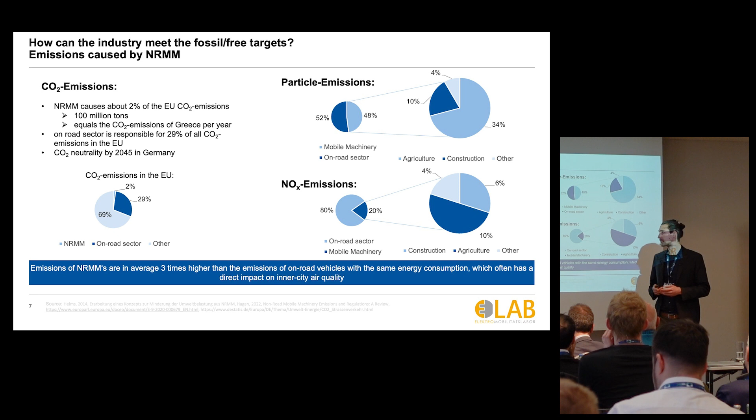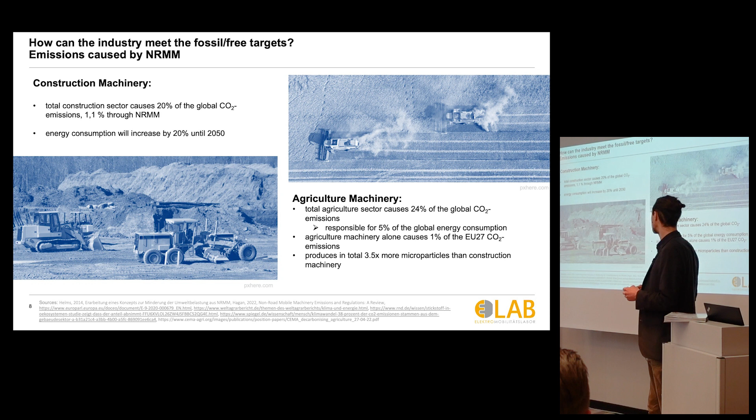And especially the agricultural sector as well as the construction sector play a critical role there. We have 20% of global CO2 emissions in the construction field, as well as about 24 or 25% in the agricultural field. About 1% of each make up the total CO2 emissions that go into the NRMM sector. As I said, the particulate emissions are very important, and up here on the right-hand side, you see the emissions during a working day.

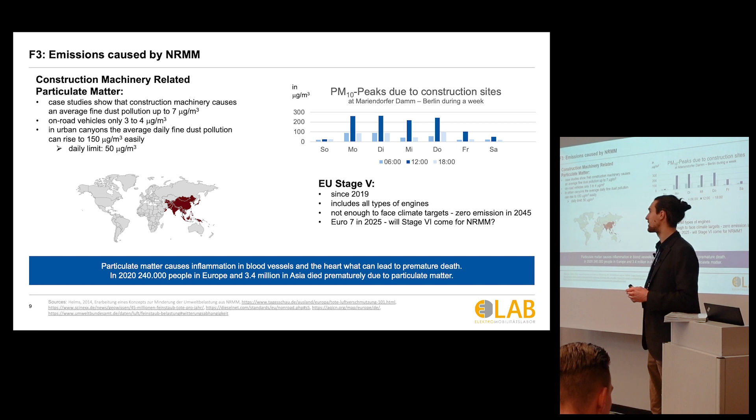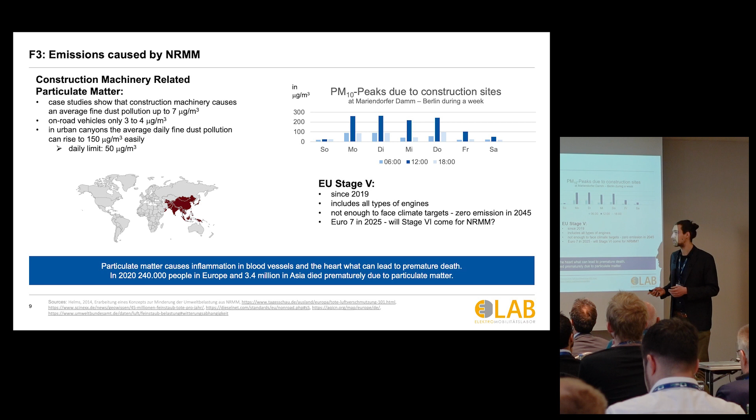This is important for Europe, but this is especially important in the Asian region, where the standards are currently a little bit lower. So therefore, we really need to electrify the drivetrain of construction equipment, but also of agricultural equipment, because the diesel engines there even have higher particulate emission than if you look at the construction machineries that are in place right now.

So that said, I will go a little bit more quickly over the first slides, and then we will focus a little bit more. So what does the market hold, and what do we need to focus on?

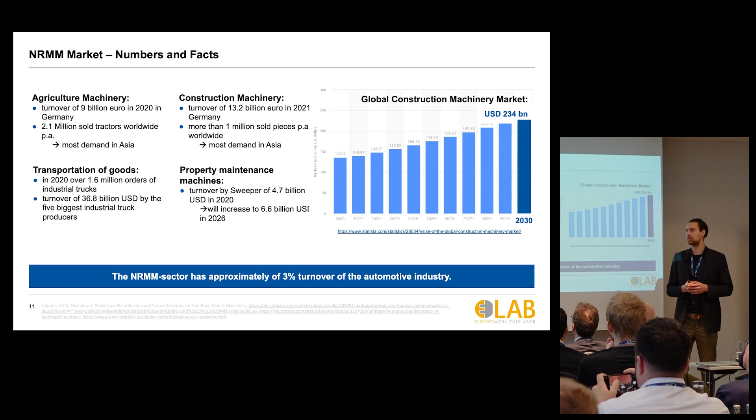We see that generally the trend in NRMM is positive, so the market is emerging. Here you see a graphic for construction machinery. We are around 230 billion US dollars in the year 2030, just to give a rough estimation of the market size. Currently, Germany makes up about 9 billion for the agricultural sector and about 13 billion for the construction sector. So generally there is a trend, although the NRMM sector is still relatively small in its complete turnover, with 3%.

So looking at the challenges we are facing, status quo. First of all, we look at the technical challenges, especially for energy supply. We need batteries or fuel cells to power our machines, and the current performance, of course there's a wide variety of different chemistries that can be applied, and we'll come to that in a minute, but that is still a limiting factor, which is holding back all the innovation in the sector that could be realized right now. And looking at our NRMMs as a whole, functional safety has to be considered during development.

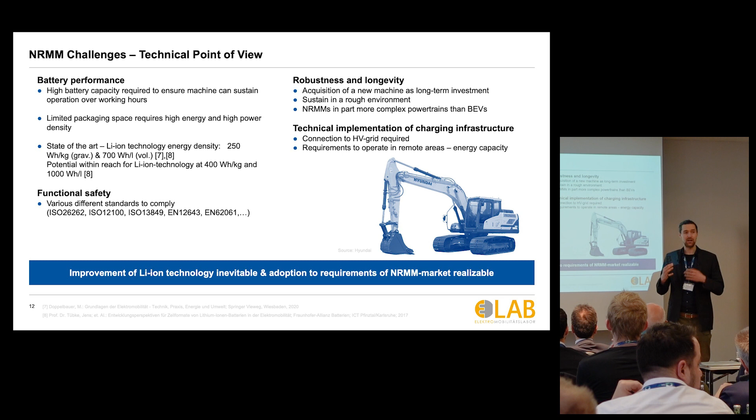Status quo, right? We are working on improving this, of course, but I think, especially for the agricultural sector, it will still not be in place in the future. So it's not an infrastructure solution that we have to come up with, but rather a technical one - increasing the capacity and the energy utilization, the efficiency of the electric drivetrains for those applications.

However, in order to decrease the cost, and we will come to the point of using scale effects to further reduce the economic burden, there are solutions in place, or actually in development, on modularizing the given battery packs in order to decrease costs. But I will come to that in a minute.

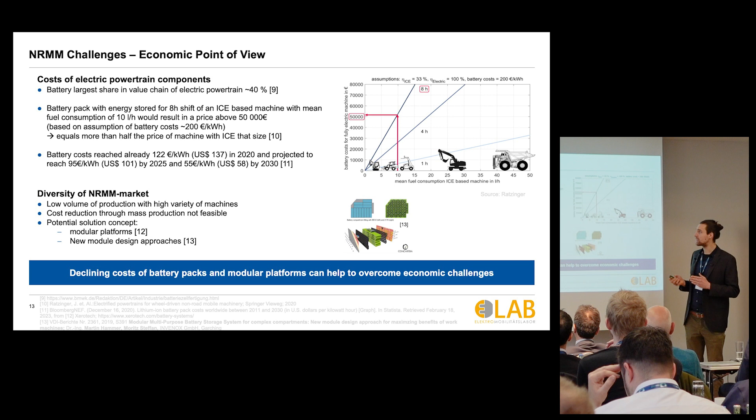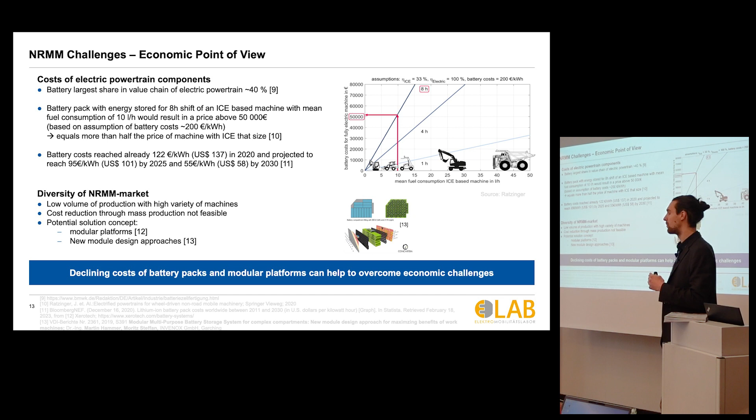So the key message here is it's still a burden implementing the battery drivetrain. If we increase the fuel consumption per hour, battery prices are decreasing, and there will be a touching point at some point where it will become more feasible. But I think we still have to wait a little and also take other challenges into consideration, and that is what I would coin here as the operational point of view.

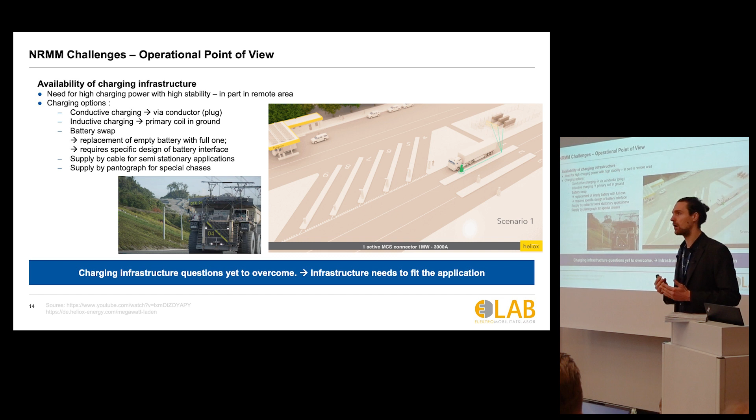So as I mentioned with the agricultural sector, charging infrastructure is not everywhere available. And the question now is, how can we solve that issue? One would be just increasing the capacity. We just saw that from an economic point of view that may not be suitable.

And then there are solutions like inductive charging, overhead lines using a pantograph. Those may be solutions, but I think only in particular areas where it really makes sense.

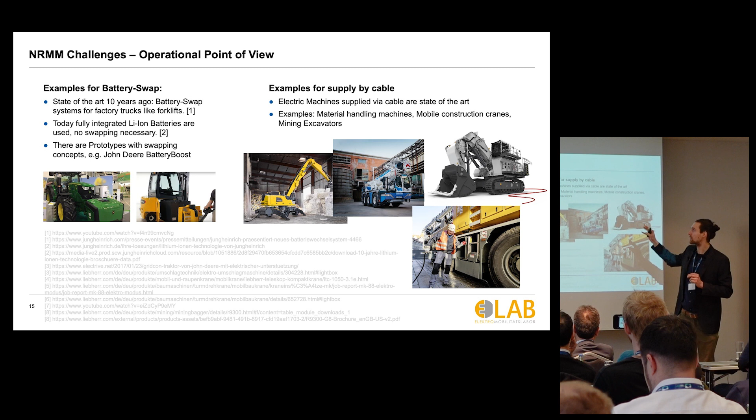One thing that is also important is the charging time, which I would like to emphasize in a minute. Before that, I'd like to emphasize two more solutions. Battery swapping is something many companies used in the past. For small applications, we see a decrease in battery swapping technologies because lithium-ion technology is ready to power through the working day. But for high energy intense applications that are rather stationary, you see power supply by means of a cable. This is certainly also the status quo right now and what you can buy on the market.

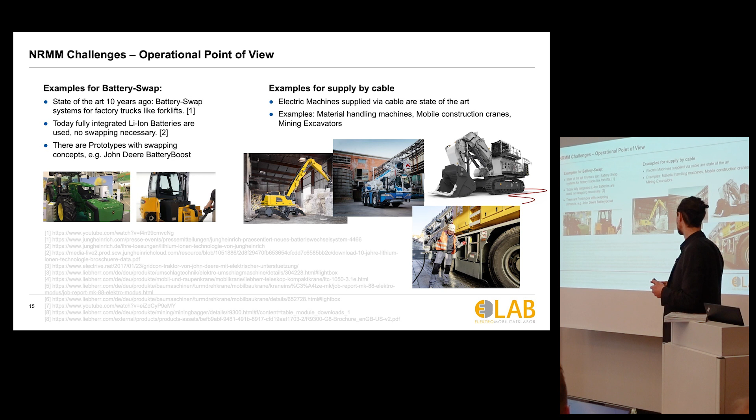Coming back to charging: consider the workday, which is generally 8 hours and potentially segmented into two 4-hour parts, morning and afternoon, with the lunch break allowing for charging time. So we did a quick calculation comparing diesel with megawatt charging, which is kind of the gold standard right now and the state of the art in research.

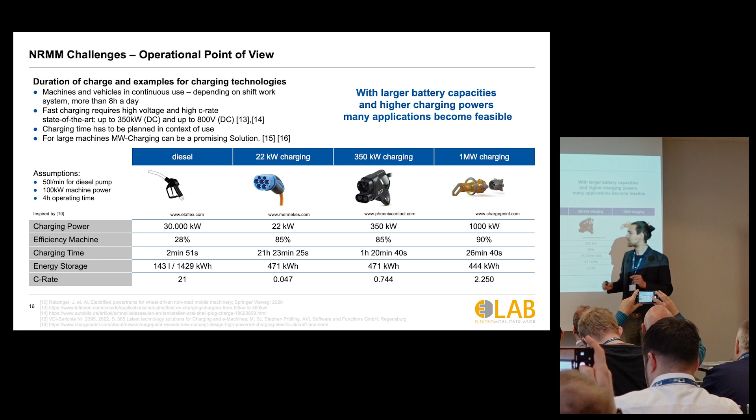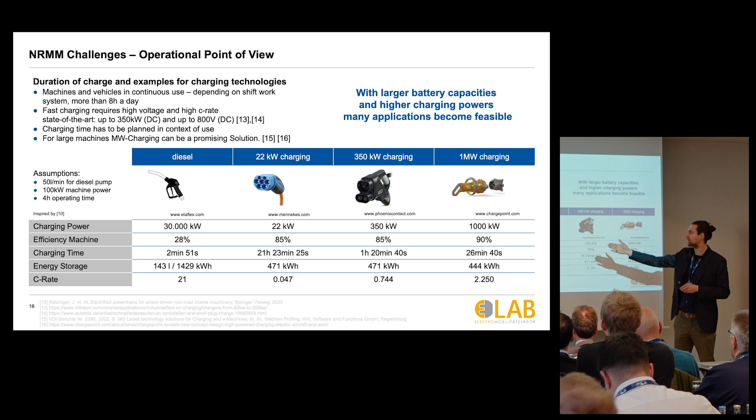So the C rate, meaning the full capacity the vehicle can retain within 1 hour, would be 1. For diesel, the gas inflow into the vehicle when tanking is about 21, so I could fill it up 21 times per hour, meaning I need 2 minutes to charge the combustion vehicle. If I look at the megawatt side, I can bring it down to 26 minutes.

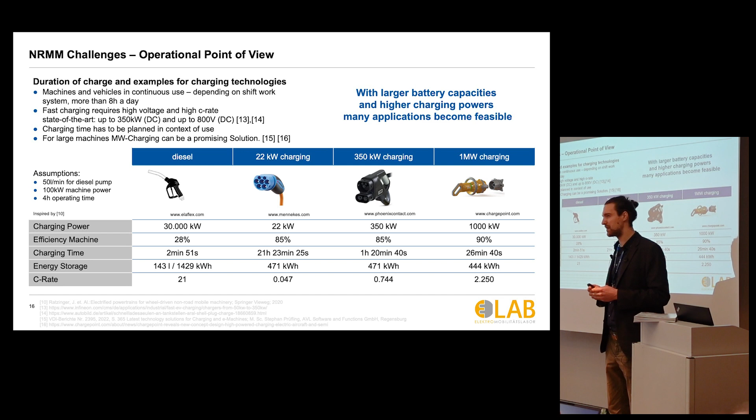That's as good as I can get right now in this example case, which would mean there may be a solution that even if we cannot power throughout the whole day, we may do so for 4 hours, then charge at midday, and use the next 4 hours with the recharged vehicle. So this example case should emphasize that many applications may become feasible due to this technology.

Very quickly, looking at services - that was a question asked by the organizers of the conference. What are the services companies can offer their customers right now? I only want to emphasize one point here, which is to include not just the product, but the service as such.

Meaning, we just talked about operational planning, right? When do you charge? How much do you charge? Having those calculations done is what we see right now within some companies. So they're not offering just their product, but very often also a service in addition to the product itself, so that the operation becomes more efficient and more effective.

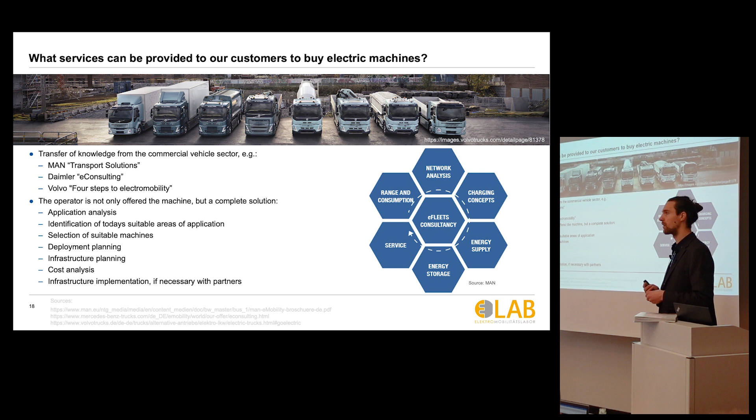There are companies like Volvo, MAN, or Daimler offering different services right now. Not to emphasize any one of those, but just to give an example of what is coming and emerging there. I think this will increase further because we see such trends also in the automotive industry, where this integration along the value chain is happening.

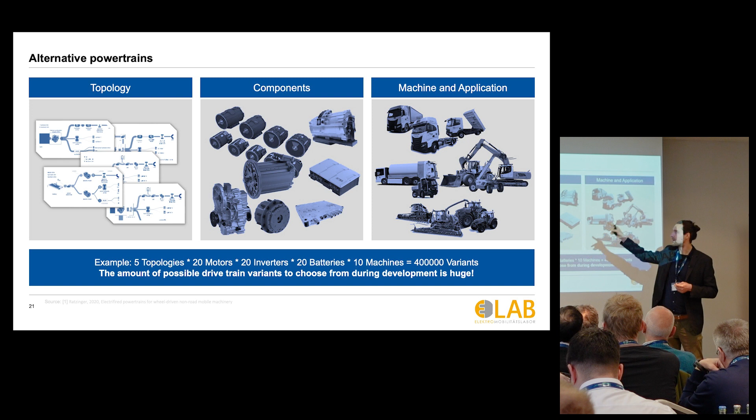So what we are doing at RWTH right now is also considering different drivetrains. I'll give one example at the end.

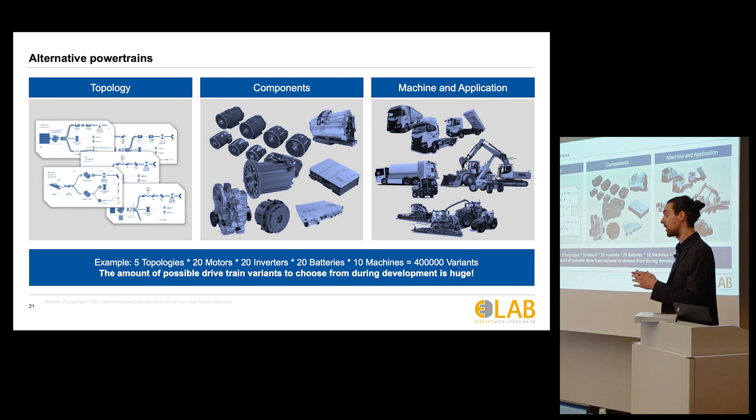Doing topology research, putting tools into place that allow for simplification of this rather complex matter. So this is one, knowing what to do. Then we need to choose from components, finding the right components right now. I think you all know that supply chain issues are there right now. I will emphasize those in a minute. And then you need to consider your application as well. And those all have to come together to build one homogeneous product or even service in the end. So this is on this end. I think I skipped those slides for now.

If we want to get a little bit more technical, we can. But I would like to go a little bit more on this. So that was the status quo.

It's a very diverse field where we have currently rather low volume production versus high volume and low diversity in the EV sector, relatively, right? Of course, there are different variants in the EV sector as well. And we are now trying to learn from that and to transfer the knowledge that we gain over the last years there to the NRMM sector.

Before we go in there, and I will give you some examples here in the third part, let's look at the second part. I structured this in 3 different phases: beginning, evolution, and revolution, and 2 special chapters on batteries, because I think their importance needs to be underlined here.

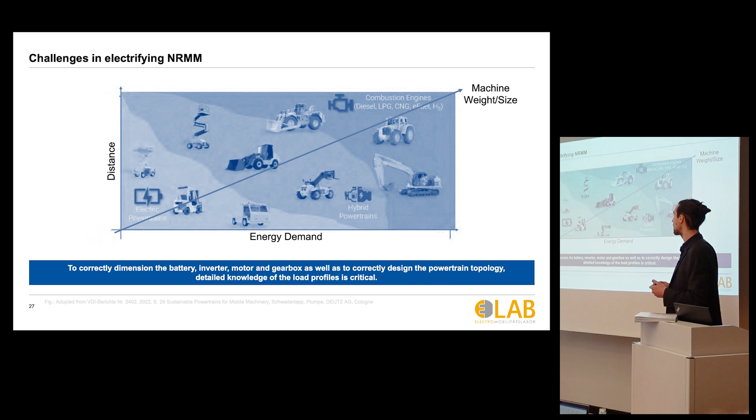And so therefore, we now have to consider and think, how far can we get here? Like how far can we move up this chart? So looking at what is happening right now.

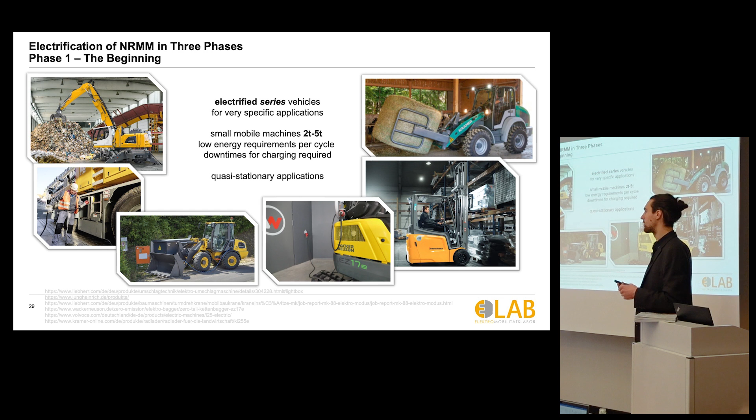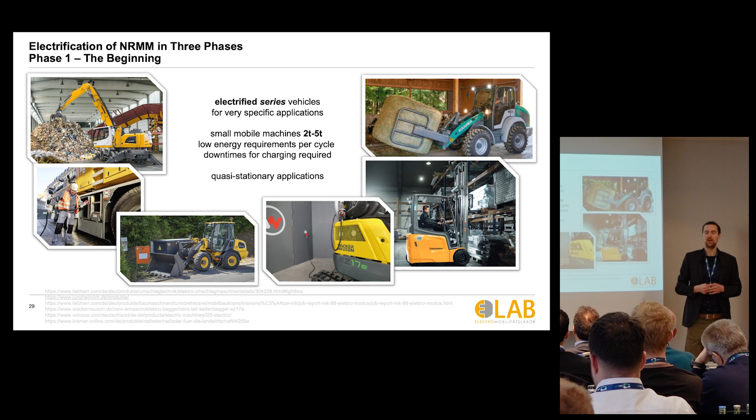The first one is electrifying everything that can be electrified right away. This holds for, as I mentioned with the cable, stationary energy or rather stationary mobile equipment, and for small equipment that doesn't need such high energy densities, like carrying equipment on machine shop floors or some maintenance machines. Those are rather suitable for electrification right away. So this is kind of the first phase, and we are talking about 2 tons to 5 tons in machine size roughly.

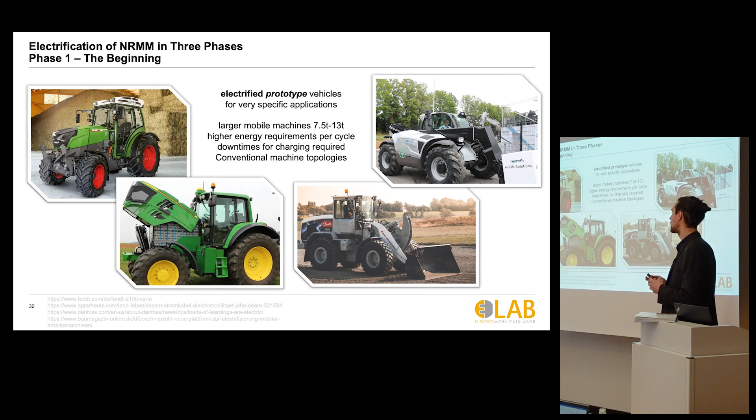Looking a little bit further, we also see that there are many prototypes built. So many companies in the last, let's say, 10 years came up with different designs, with different ideas on electrifying the equipment, and that was already given. We are talking about a tonnage here, a machine size of about 7 tons. As I said, these were prototypes. There were not really many serious production equipments yet.

And then, if we look at it further, there are also, besides those purely electrified prototype concepts, hybrid concepts that are in development right now or have been established. So they're trying to get the best out of both worlds right now.

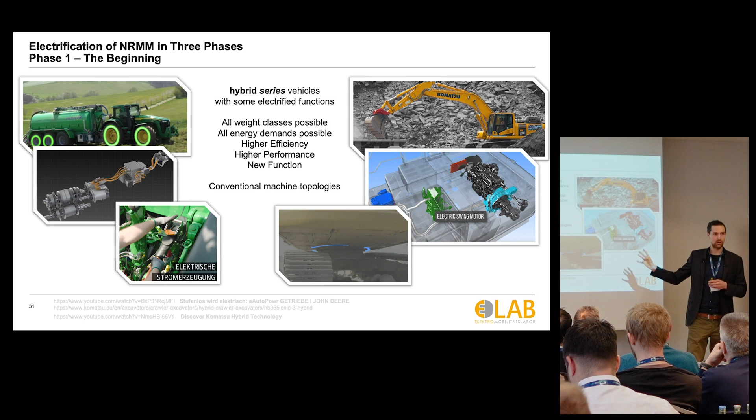And now I would like to see, together with you, can we bring this up to the next level, meaning fully electrifying this? Also, not just for the small applications, but for the bigger ones as well. This is what we do on the next slides.

Before we jump into that, we always have to consider that the one thing is the technological potential that is there, but the other question is, can that potential also be accessed right now? And there we look at the supply chain, right? So where do we see bottlenecks potentially? That is the one point on this.

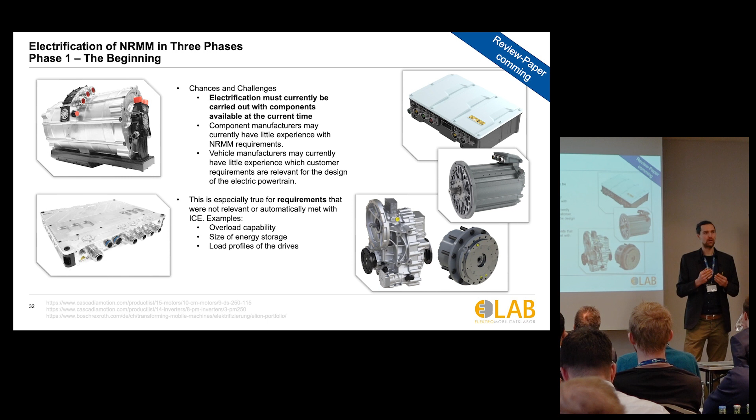And where do requirements, due to also different potential that we have in the beginning, or considering ICE, so combustion engines, we had like one central motor that was driving the whole machine usually. Now we have different topologies and we can optimize differently. So that means we could also reconsider the requirements on the drivetrain that may now change.

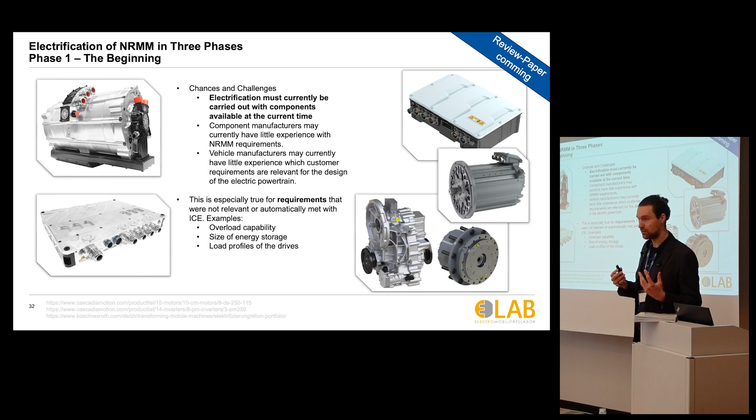That would lead to more or less components actually needed to fulfill the same job, but using an electrified drivetrain. Considering what we call now the second phase, trying to not rethink everything—we'll come to that in the revolution part—but in order to optimize, to push in this direction through engineering, development, research, etc., increasing drivetrain efficiency and increasing the general limits that battery technology currently holds.

Just a quick example on drivetrain efficiency: look at an excavator. It usually has a hydraulic pump to operate its auxiliary equipment. What you can do there is, through electrohydraulics, operate these excavators at different hydraulic pressures—not losing any excess hydraulic energy that has to be built up. Meaning changing the pressure level and regulating the volume flow more efficiently. This is one of the optimization strategies we see again and again.

Again taking this excavator example, recuperation of energy—when you turn the machine, which happens very often in the day, every movement can or has to be braked, so you decelerate the tower again. That energy can be regained for accelerating the tower, and thereby we can also harness energy efficiencies. But coming back to batteries, we also need to push the limits further.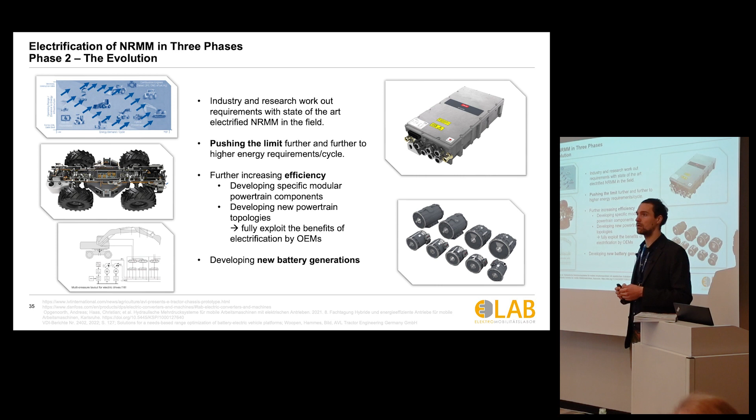I'd like to look at the battery supply chain and general battery technology before we get to the supply chain, to give you some understanding of where we are in terms of battery. Some of you may already be thinking, what about fuel cells? I'll touch on that a little at the end, but I'd like to emphasize the battery field in this presentation.

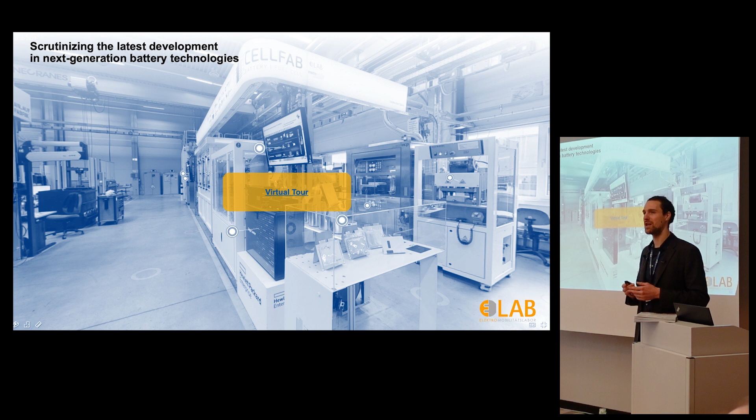A lot of engineering and development is happening right now. This is our pilot line at eLab, and you're invited to take a virtual tour afterwards when you receive the presentation—that would be a bit beyond the scope of this talk. I just wanted to mention it, so if you'd like an in-depth view of how the research is done, please have a look.

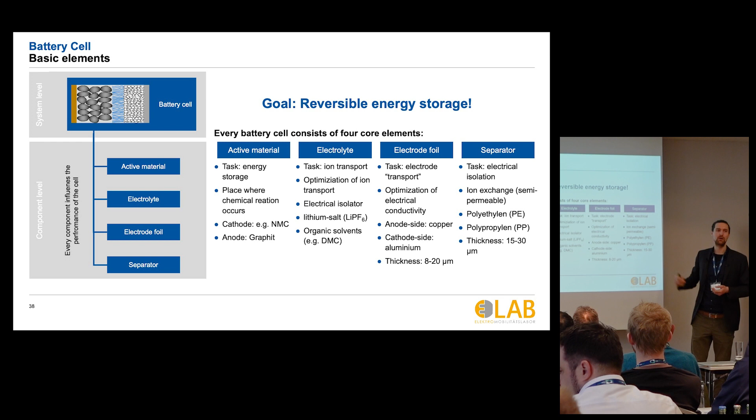To give you some background on battery functionality, we have basically four components: the active material, the electrolyte, the electrode foil where the active material is coated on, and lastly the separator. These are really the four key components anyone has to deal with if they want to build a high-performing battery cell.

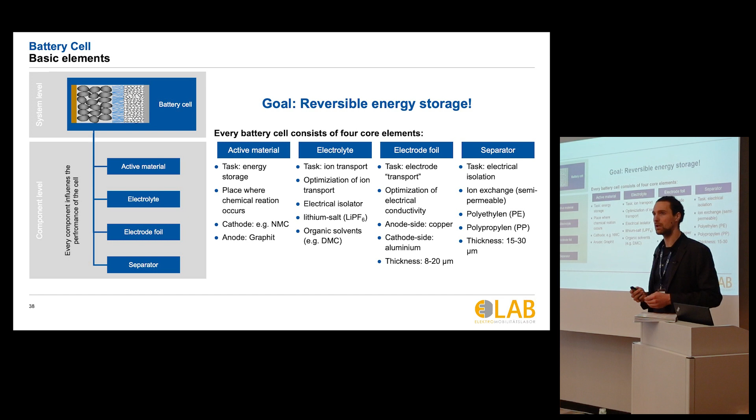There's research going on in every field, I'd say, but this one is always much discussed, so I'll emphasize it today. On the cathode side, the positive electrode, we have different materials available. On the left-hand side is NCA, a material Tesla formerly used a lot in their vehicles. It's not the most common material anymore, but this is kind of where things started, and it still has its usage.

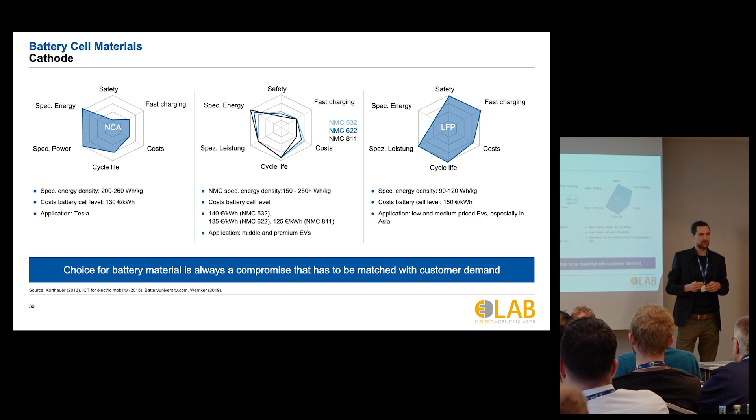Considering other technologies such as NMC—nickel manganese cobalt oxide—which comes in various forms and weight percentages, meaning the mixing of the different material components, we see different performance aspects. One always has to consider these points critically; if you look closely, they all change a bit, and it also depends on the later cell design. Nevertheless, this technology is currently, in terms of energy density, kind of the gold standard, I'd say.

Looking at the right-hand side, this is an interesting material: lithium iron phosphate, which was believed to be dead about four years ago. Everyone thought it was an old technology with no use. Then suddenly, on the Asian market, some innovation happened, and now everyone is talking about LFP again. It doesn't have a high specific energy density, but it doesn't need cobalt, it doesn't need high nickel content, or nickel at all actually. So it's very environmentally friendly and cheap, and it has many more benefits I can't go into right now.

This is emerging right now again, even though many considered that it wouldn't.

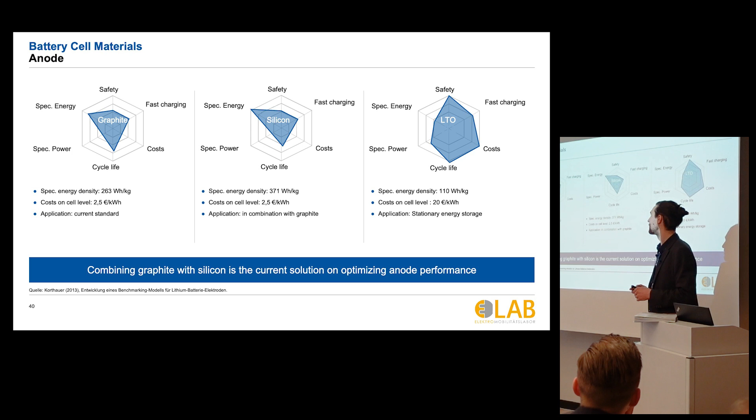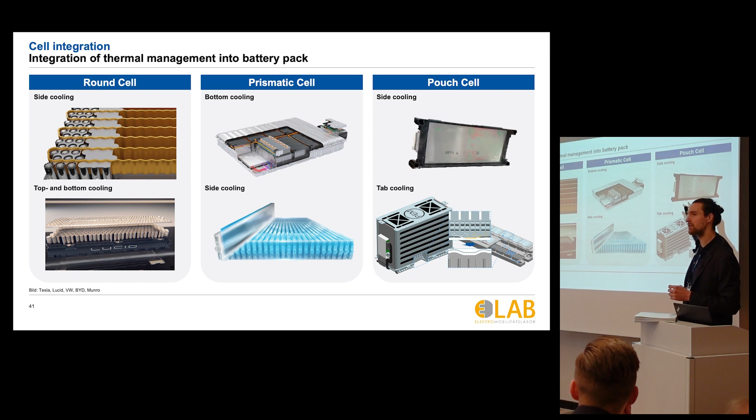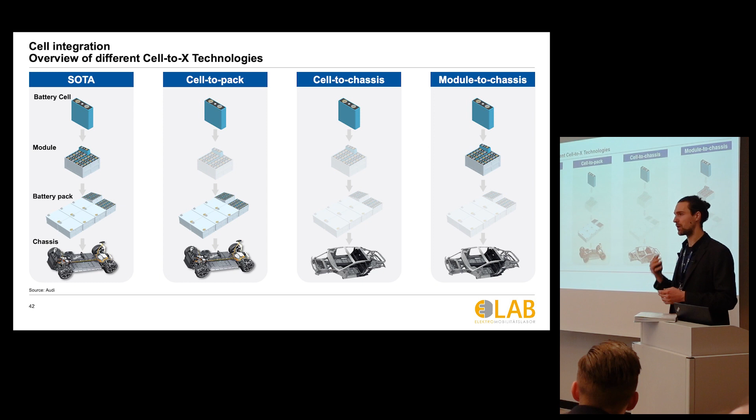On the anode side, we have a similar picture, choosing different technologies, but I won't go into detail on that right now. So now you take the chemistry and build it up into a cell. Round cell, prismatic cell, and pouch cell are different formats available. Then you have to consider how to take those cells, depending on the format, into the vehicle. Using the EV example, there are different ways: you can build modules, but you can also do a whole pack integration, or even integrate into chassis. I'm emphasizing this because these are thoughts that must be remembered when designing NRMM equipment as well, since we have high variance and need high modularity.

The research conducted here may also be important for later as well.

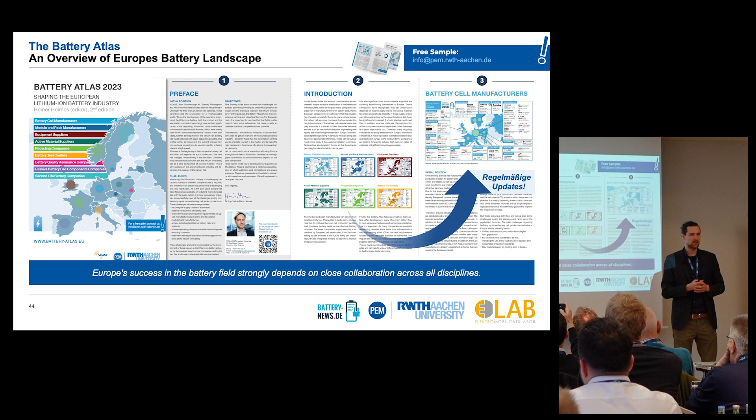Now I'd like to invite you to have a look at the battery atlas. Within our network, together with the chair of PEM and Battery News, we researched what the different key players in the field are currently. This is what we came up with, our different landscapes. There you can really get an overview of who is actually doing what in the field right now, if you're looking for suppliers. As said, the link is in the presentation.

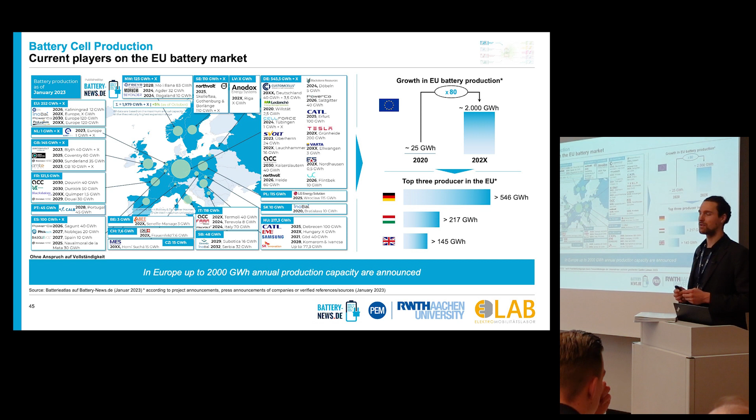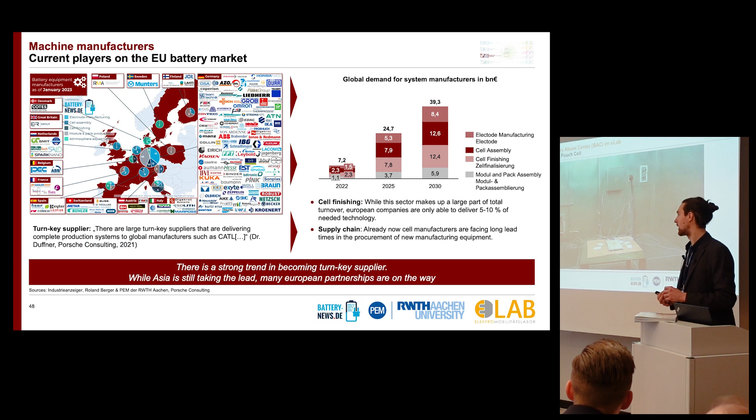I will skip over those details due to time, but feel free to ask a question about it in the panel discussion later, or connect with me in the break.

So in terms of revolution, what is happening now? The question is whether fuel cell is the answer to revolutionizing the whole field. We saw that the evolution will heavily depend on batteries, and for the revolution part, maybe fuel cell will have its role. But to be honest, we don't know yet really what the potential will be. There are prototypes, as I highlighted earlier, that may actually result in and find their way into serious application, but currently we cannot say for sure.

Here are a couple of examples that try to bring fuel cell technology forward.

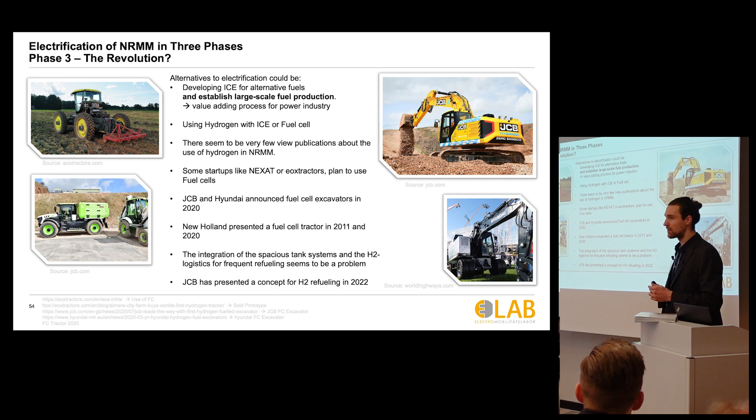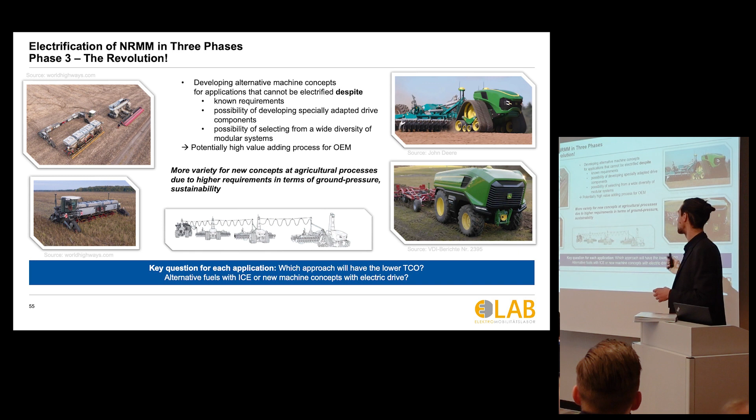What is certain though, is that the battery field will be present in the future, and it will find new ways. So meaning it's not only the drivetrain that will change and electrify, but maybe due to the higher flexibility that emerges, we will see different applicational topologies. For example, combining different smaller harvesters into one harvesting system, to put this as an example here. Some prototypes are in the field and being tested right now as well.

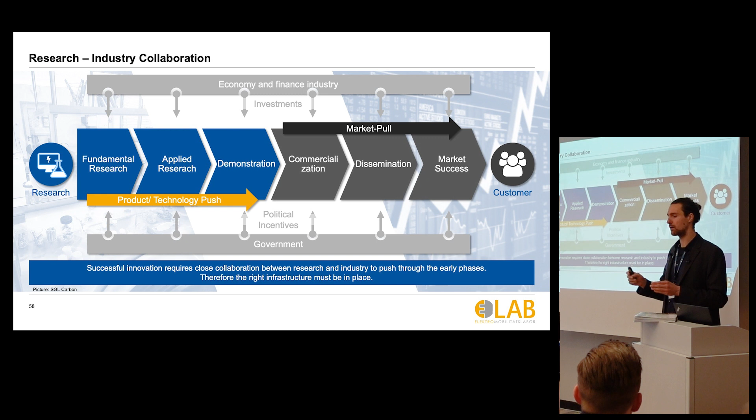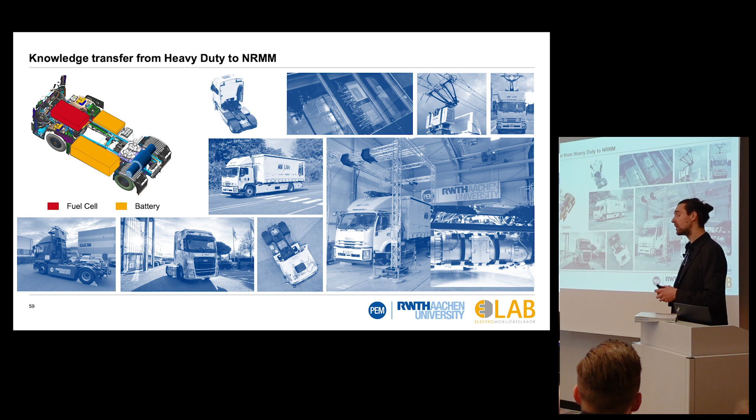Quick emphasis on what is now in front of us looking into the future. I think it's important to emphasize that we have a market pull always, and when a product becomes economically viable, but we need to sustain this technology push phase. And I think for NRMMs, we are right in that phase right now. With eLab, for example, we would like to support by doing research and bringing certain technological innovations forward. We've gathered some experience in the heavy-duty industry that may be transferable to certain NRMM applications.

What I'd like to emphasize in the final part is again this topology aspect. As I said, the number of variants is very big, and we need to try to simplify, or at least get an overview. Our researchers are also taking a close look at the solutions available there, and we may also be able to support you on that end.